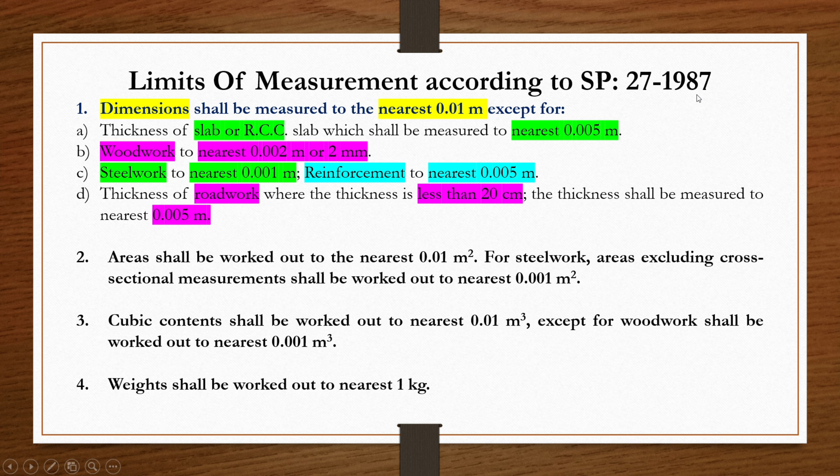Now let us see where these values come from. So here it is mentioned SP 27 1987. This is a handbook actually, and the data in SP 27 1987 are all worked out from the original code. So we will see the original code also and this handbook also. See, I have a PDF here that I have downloaded from Google. We have SP 27 1987. This is the handbook of method of measurement of building works.

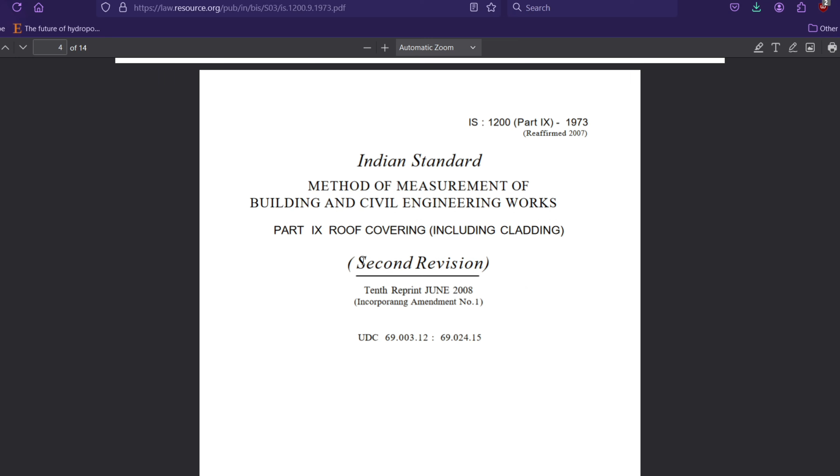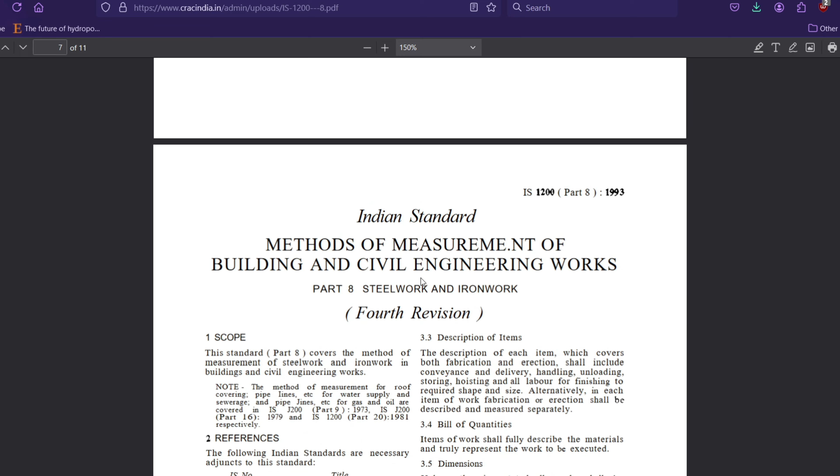This is the first revision, that is handbook of method of measurement of building works. Here you can see the name SP 27 1987. So this is its name, and everything that this handbook contains is taken from the main IS code. Like we have here IS 1200 part 9 1973. This is for roof covering. Similarly, IS 1200 part 8, this is for steel work and iron work.

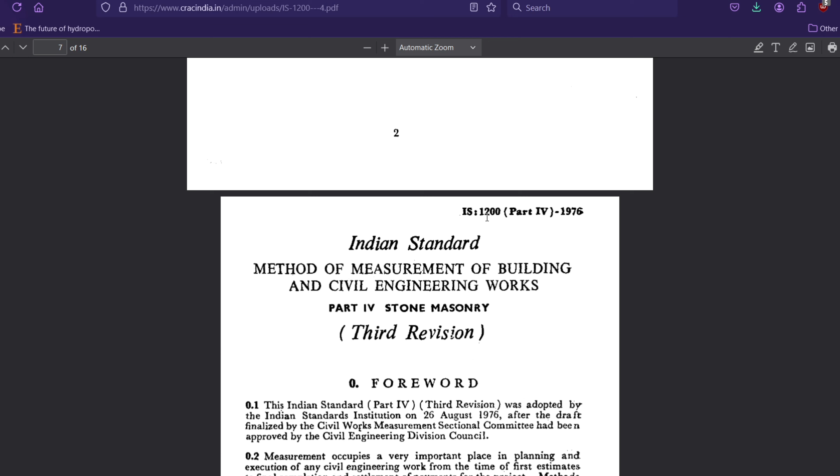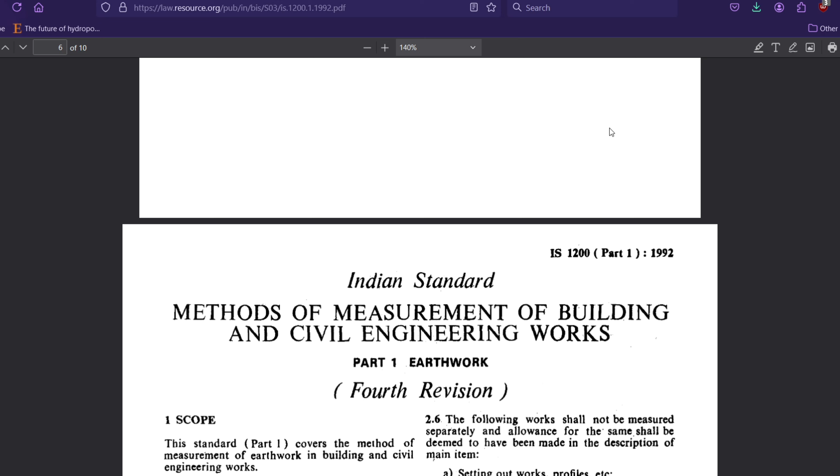Similarly, we have here IS 1200 part 5, this is for form work. Similarly, IS 1200 part 4, this is for stone masonry. Part 3 for brick work. Here part 2 for concrete work and part 1 for earthwork, and we have so many parts of this IS 1200, and these all codes are contained by SP 27 1987.

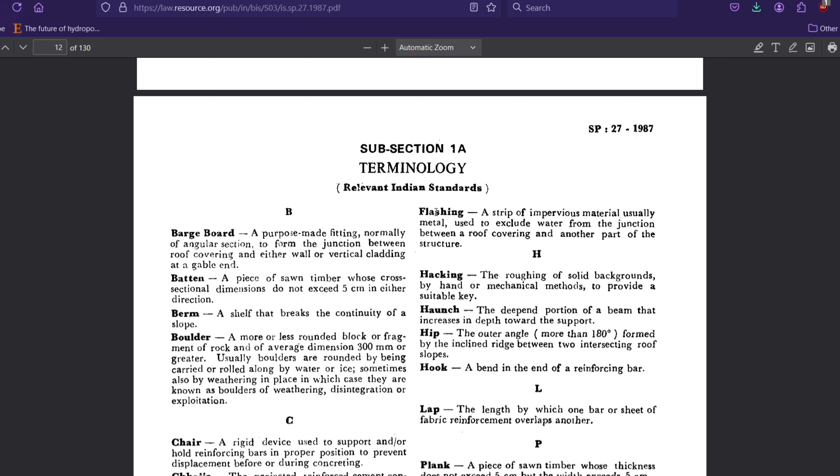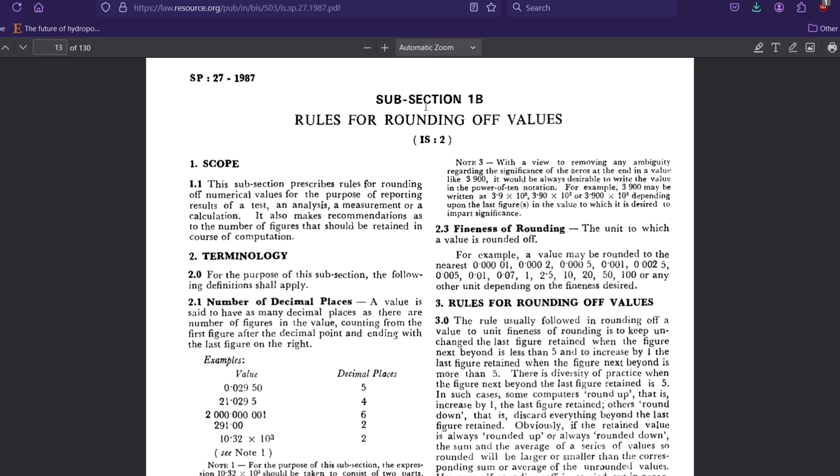Here in subsection 1a we have the terminology. If you don't know about any of these terms, then you can refer to these terms in this code. And then in subsection 1b we have the rules for rounding off values, how to round off the values.

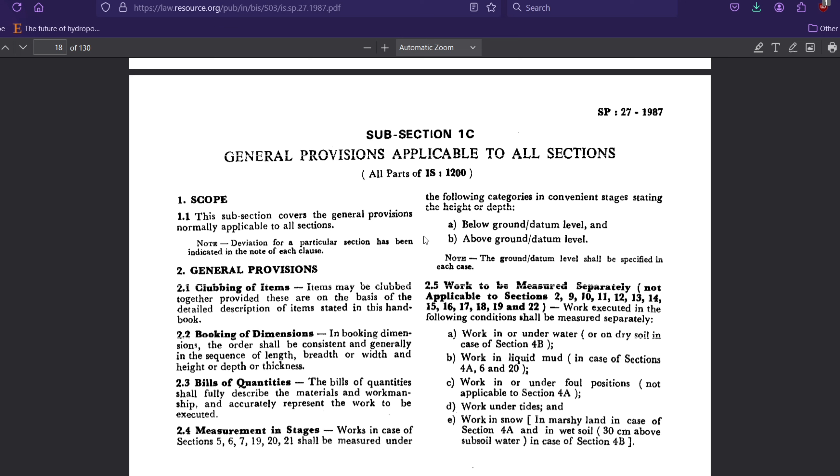Then we have general provisions applicable to all sections. We don't require this right now. And this is about the material, which is left blank here. Method of measurements of materials.

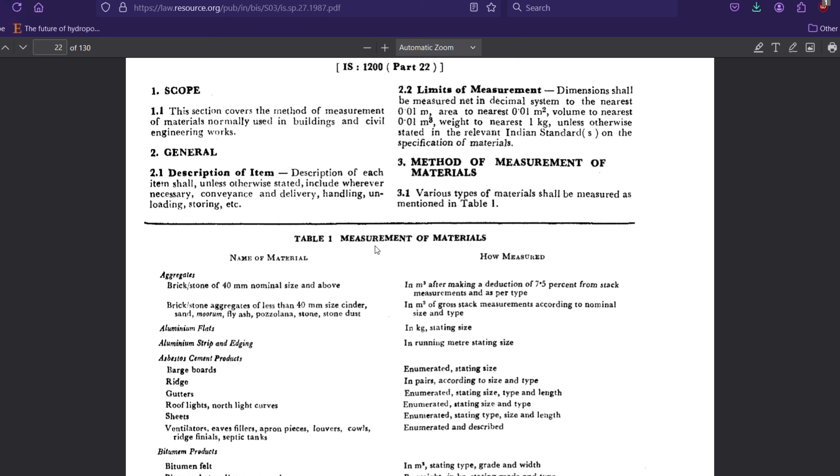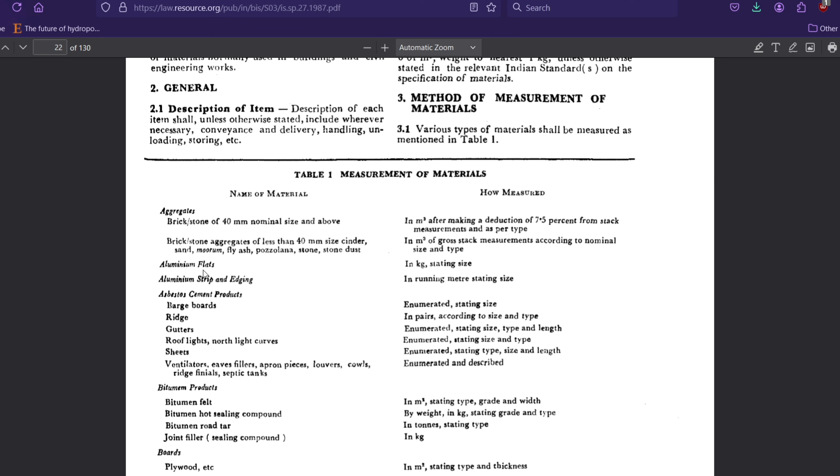This is a measurement of materials like aggregates, brick or stone of 40 mm nominal size and above in cubic meters after making a deduction of 7.5% from stack measurements. Here is about the measurement of materials. If you want to refer anything, you can refer from here, like plywood is measured in square meters stating type and thickness. Similarly, bricks or brick tiles are enumerated stating class and size. The bricks are measured in numbers, but their class should be stated there.

Okay, so we have so many materials here, but we are not interested in this. We are interested from here, from section 3, in the earthwork. Here you can see the general rules are mentioned. In 2.1 we have measurements. Unless otherwise stated, all work shall be measured net in decimal system as fixed. Each dimension shall be measured to the nearest 0.01 meter.

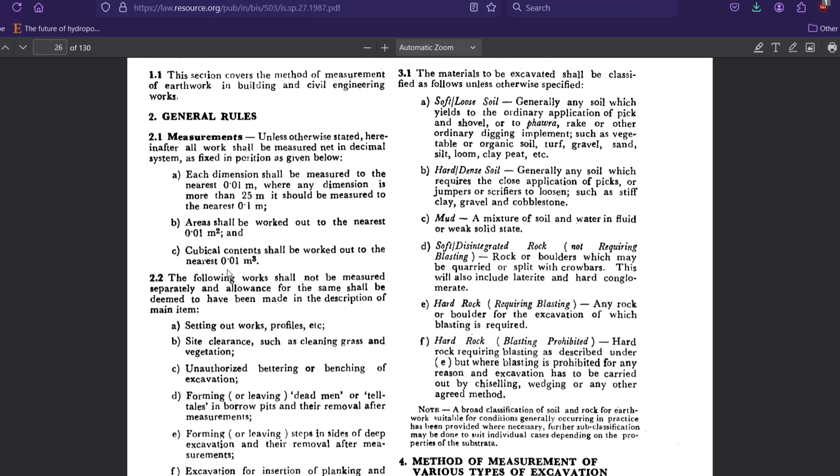Where any dimension is more than 25 meters, it should be measured to the nearest 0.1 meter. Otherwise, each dimension shall be measured to the nearest 0.01 meter. Similarly, the area shall be worked out to the nearest 0.01 square meter, and the cubical content shall be worked out to the nearest 0.01 cubic meter. So this is the general part.

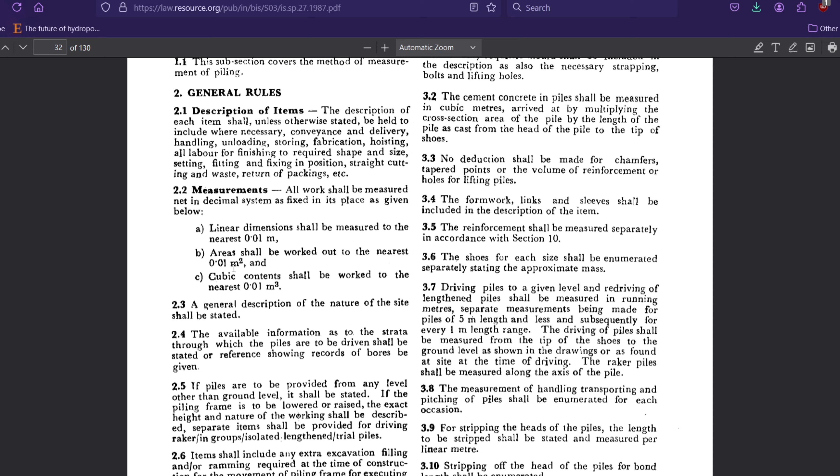And now we have foundations. Here is about the pile foundation. In pile foundation you can see the measurements. If you want to study in detail, you can refer this code. Linear dimension 0.01 meter, area 0.01 square meter, and cubic content 0.01 cubic meter, so no change. Here is the well foundation. In well foundation also the measurements are the same: linear dimension 0.01 meter, areas nearest to 0.01 square meter, and cubic contents nearest to 0.01 cubic meter.

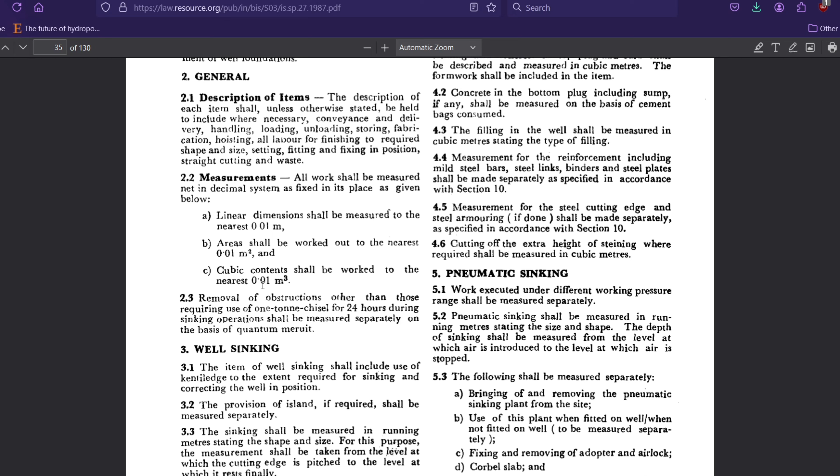Similarly, here you can see the concrete works. In the concrete works, see the dimensions. Unless otherwise stated, all works shall be measured net in decimal system as fixed in place, as given in 2.2.1 to 2.2.3. Any work done extra over the specified dimensions shall be ignored. So in 2.2.1 to 2.2.3 you can see all the dimensions specified.

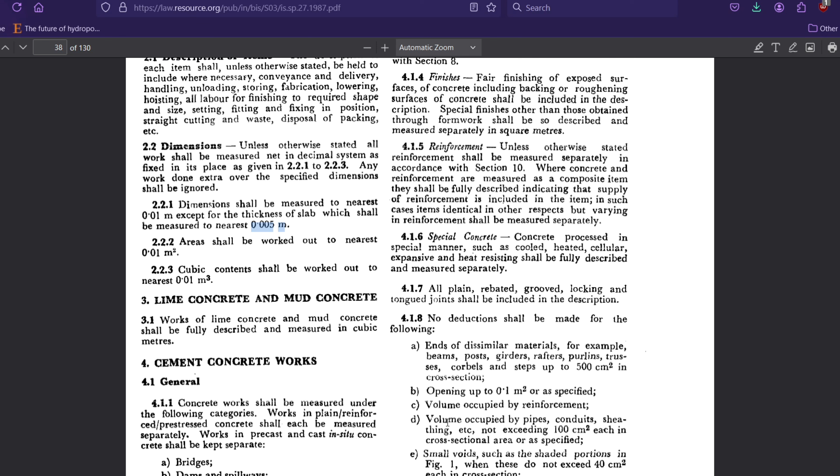So here the dimensions shall be measured to the nearest 0.01 meter, which is general, except for the thickness of slab, which shall be measured to the nearest 0.005 meter. The general is 0.01 meter, and for the slab it is 0.005 meter. The same thing is given here in the code also. The area shall be worked out to the nearest 0.01 square meter, and the cubic content to 0.01 cubic meter. So this was for the concrete work.

And now we will move to brickwork. Let us see the measurement. Brickwork shall generally be measured in cubic meters unless otherwise stated. But walls 1 brick thick and less shall each be measured separately in square meters stating thickness. If it is a half brick wall, less than a full brick wall, then it should be measured in square meters, but the thickness of that wall should be stated.

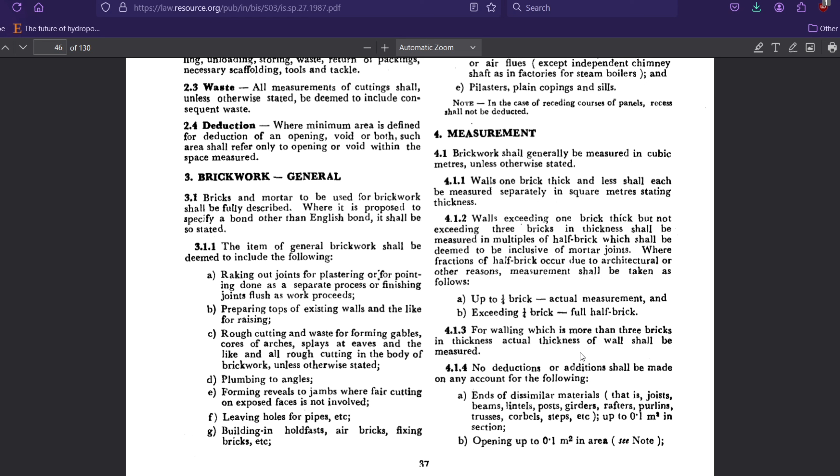Walls exceeding 1 brick thick but not exceeding 3 bricks in thickness shall be measured in multiples of half brick, inclusive of mortar joints. Where fractions of half brick occur due to architectural or other reasons, measurement shall be taken as follows: up to 1/4 brick, actual measurement, and exceeding 1/4 brick, full half brick. For walling more than 3 bricks in thickness, actual thickness of wall shall be measured. Ends of dissimilar materials we will see in coming videos.

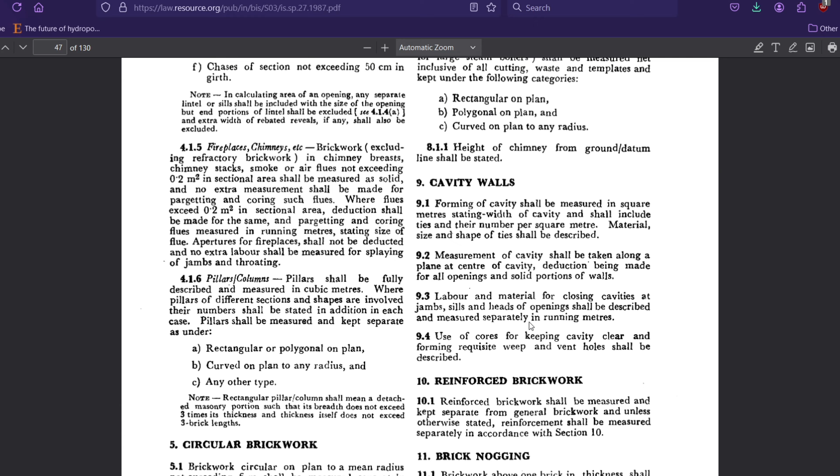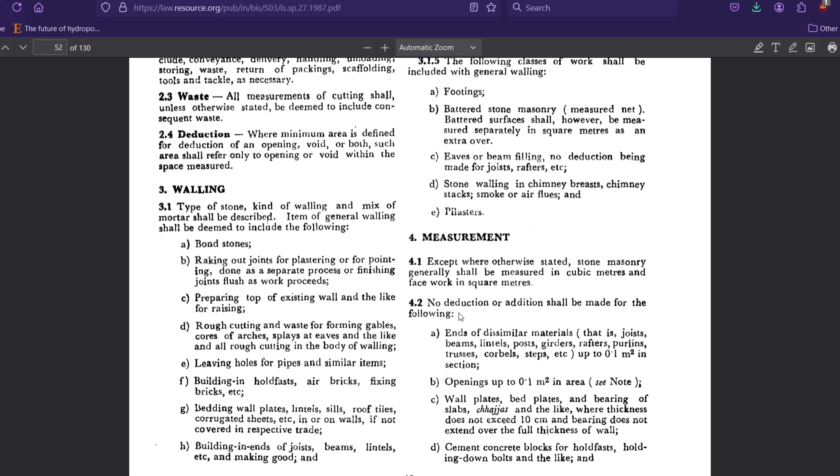Again, now we'll move to formwork here. In the formwork, here are the measurements. All work shall be measured net in decimal system as fixed in its place as given in 2.2.1 and 2.2.2. Dimensions shall be measured up to nearest 0.01 meter, and the area shall be worked out to the nearest 0.01 square meter. There is no cubical content in formwork because the measurement of formwork is generally in square meter.

Now the woodwork and joinery. In the woodwork and joinery, what we have seen here, woodwork to nearest 0.002 meter or 2 mm. So let us see. Here is the measurement unless otherwise stated. Length and width shall be measured to nearest 0.01 meter, but width of single or detached planks shall however be measured to the nearest 2 mm. 2 mm is 0.002 meter. Here what we have seen, 0.002 meter or 2 mm.

Thickness shall be measured to the nearest 2 mm. Now the scantlings, battens and baulks shall however be measured to the nearest 2 mm in each cross-sectional dimension. If you want to know about scantlings, battens and baulks, you can see its terminologies. And in 2.2.2, area shall be worked out to the nearest 0.01 square meter, and the cubical content shall be worked out to the nearest 0.001 cubic meter.

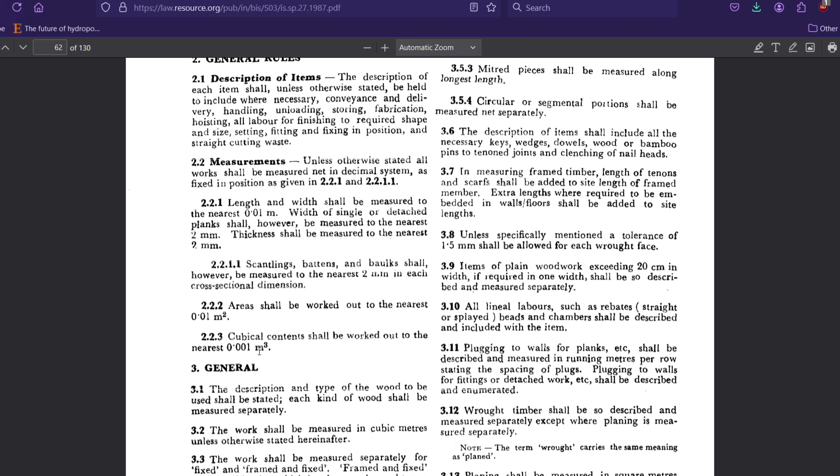And now if you move further, you can see the steel work and iron work. Here are the dimensions. Excepting cross section and thickness of plate, dimensions shall be measured to nearest 0.001 meter except for reinforcement, which shall be measured to nearest 0.005 meter. In case of plate, excepting the thickness and cross section, all the dimensions should be measured to the nearest 0.001 meter, and for the reinforcement 0.005 meter. Same thing we have seen here: steel work to the nearest 0.001 meter and reinforcement to nearest 0.005 meter.

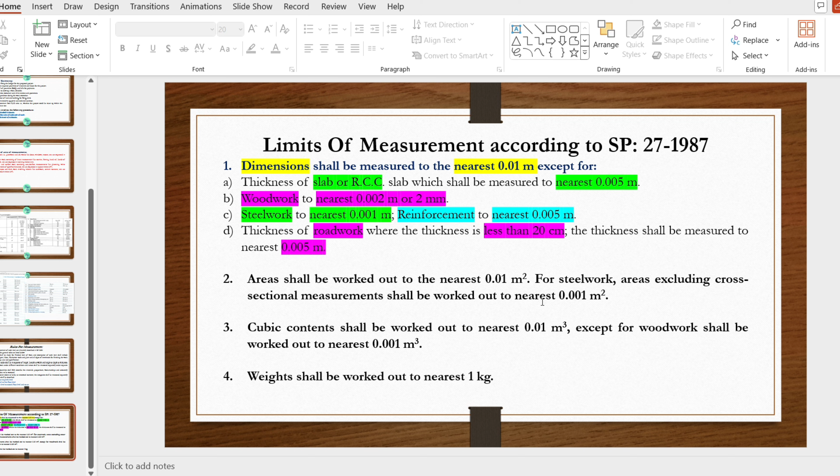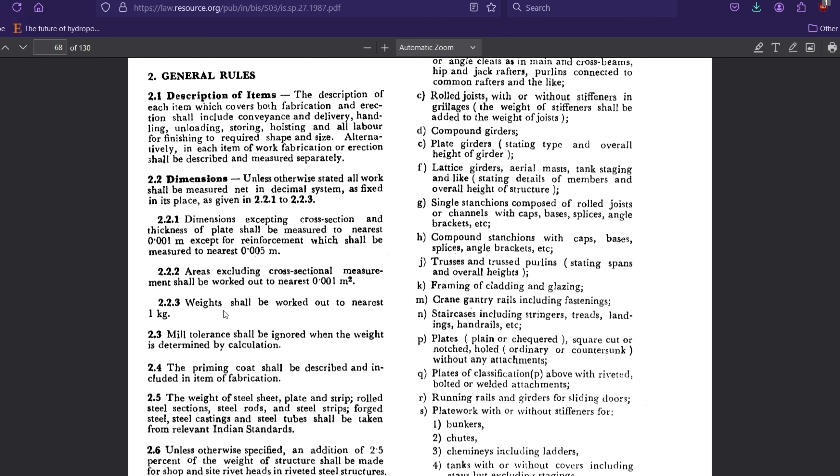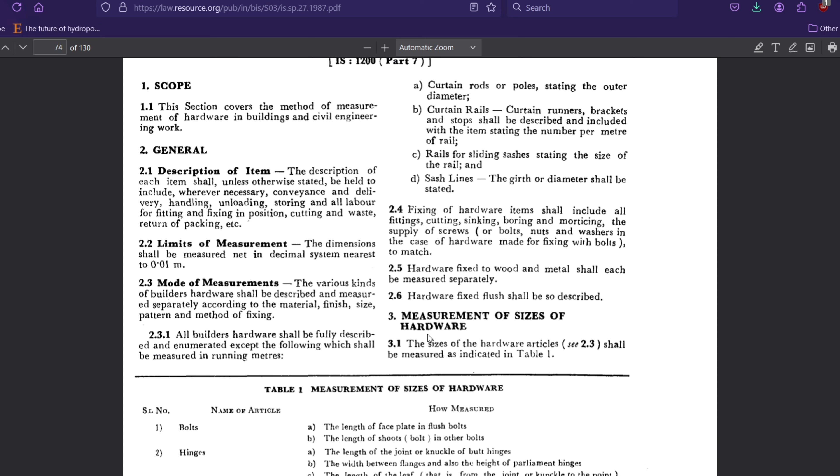Areas shall be worked out to the nearest 0.01 square meter. Here for steel work, areas excluding cross sectional measurements shall be worked out to the nearest 0.001 square meter. And now weights shall be worked out to nearest 1 kg. In case of steel work and iron work, the weights shall be worked out to the nearest 1 kg. Now again, if we move further, we can see the hardware. Here are the measurement of size and sizes of hardware.

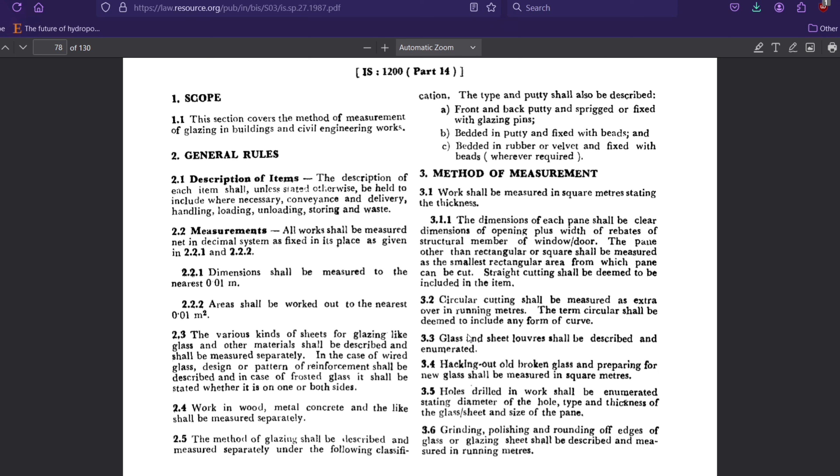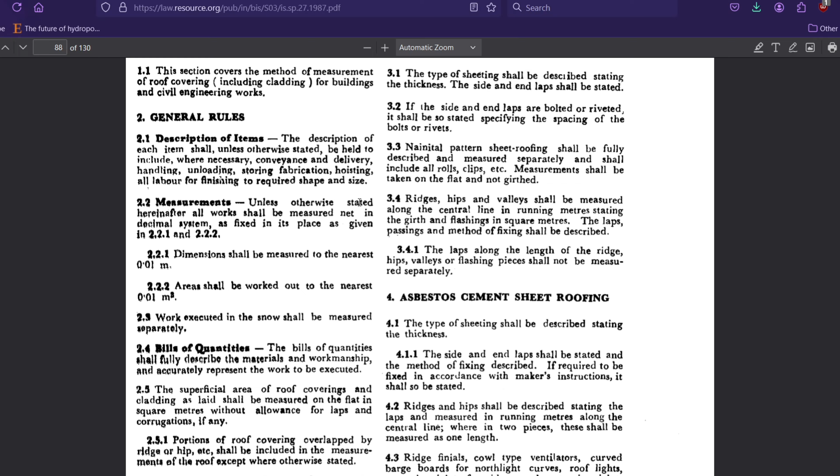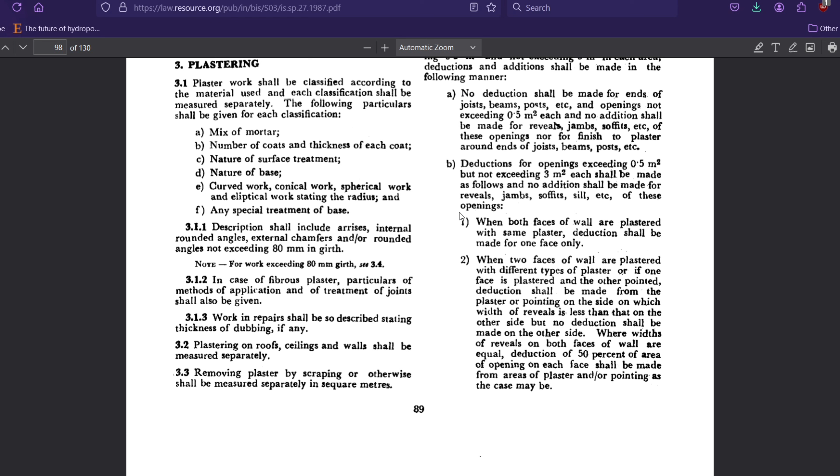Paving, floor finishes, dado and skirting. Here is the roof covering. About roof covering, like asbestos cement sheet roofing, metal sheet roofing, anything you want to know, you can visit this code or read this code in detail. Next we have ceiling and lining, then we have plastering and pointing. So in the plastering, one important term here is deduction. About the deduction, you can get all the details here.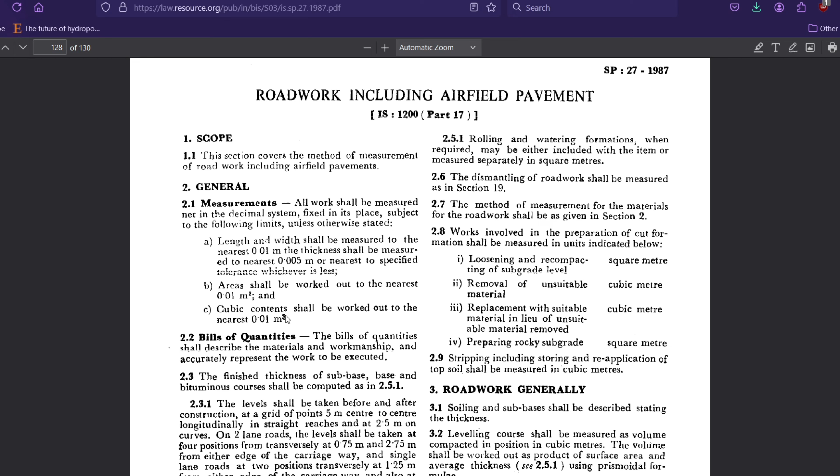And now we want to see all the road works. So we will move here to section 22, road work including airfield pavement, about the runway. Here's the measurement. All work shall be measured net in decimal system fixed in its place subject to the following limits unless otherwise stated. Length and width shall be measured to the nearest 0.01 meter. The thickness shall be measured to the nearest 0.005 meter or nearest to specified tolerances, whichever is less. Area shall be worked out to the nearest 0.01 square meter and the cubic content shall be worked out to the nearest 0.01 cubic meter.

Okay, now this was the general methods of measurement in building works. If you want more about all these things, you can yourself see this code SP 27 1987. This is the first revision of SP 27 1984. And if you want to get the standard IS code, you can download from Google every part of IS 1200, IS 1200 part 1, part 2, part 3, part 4. There are so many parts of this code, so you can see that also. But if you want to see all these things in a single handbook, then you can download SP 27 1987.